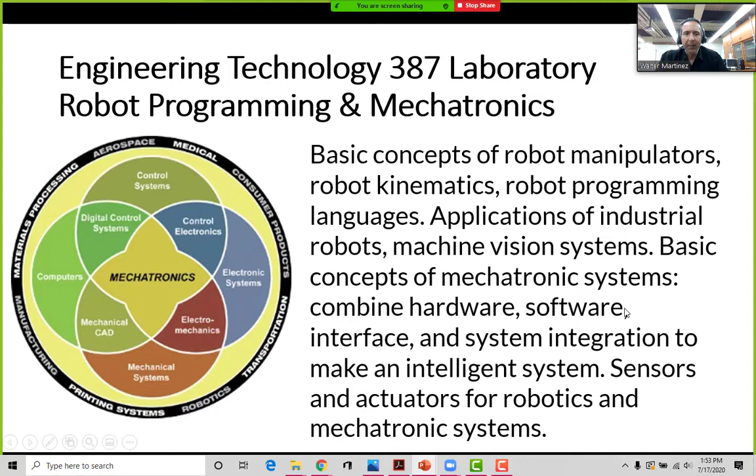There are 5 labs that we're going to cover, but let's first start with some of the things we're going to be doing here. Again, we're going to have a little bit of electronics - it's a little bit like my workstation looks like in my lab. We're going to have some software programming, and we're going to have some mechanics as well.

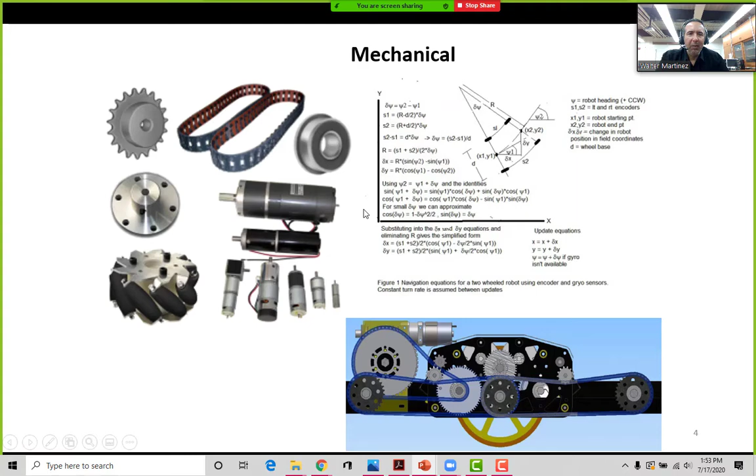A lot of the main industries using robotics or mechatronics include things like industrial robots, of course, right? Medical robots, aerospace robotics. But there are also other areas starting to come up a lot right now, and that is farming, for example, right? Mining trucks that are automated.

So imagine if you build a small robot with sensors that thinks and moves around and navigates on its own - that would be like building the mining truck, or building this farming tractor, or the Roomba, for example. It's the same concept: you have motors, you have sensors, you have mechanics, and you have software. They all have the exact same components.

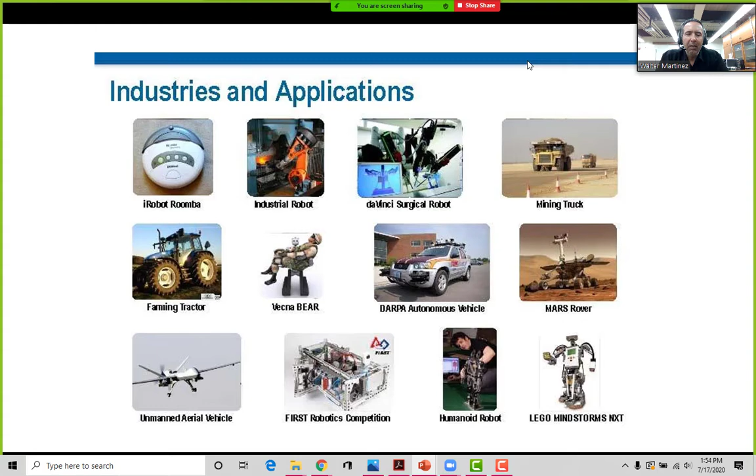So by learning how to do one, you have an idea of basically the understanding of the inside of how things work.

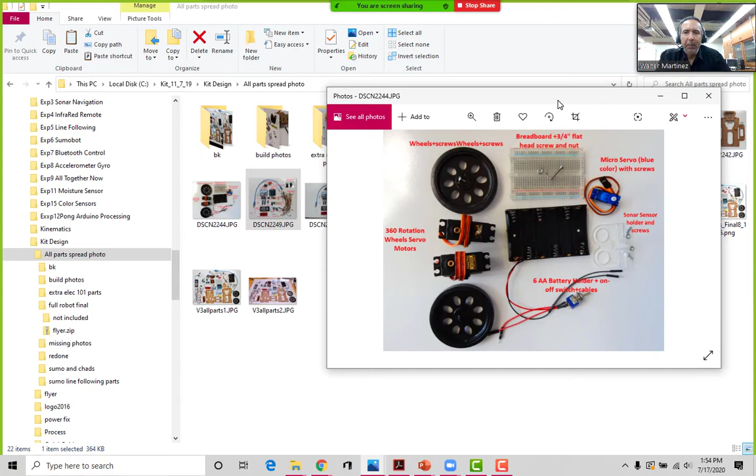This is the little robot kit that we're going to be using. The robot kit consists of a lot of parts, and let me show you a little bit of what those parts look like. Okay, that's the electronics of it. Let me grab a different view here.

Alright, so these are all the parts that you have, right? You have some of the chassis, you have some wheels, you have some motors over here, right? And you have a computer, which is the Arduino. You have a lot of sensors. You have Bluetooth radio communications, you have infrared remote, and then you have a way to program it, a power source, and a whole bunch of hardware and other sensors, an accelerometer, some other servo motors in here.

And so we'll be building this kit, and the kit looks something like this. You have the assembled robot - you have the top level, you have the bottom level here, and you have the wheels, and you have some sensors on the top. You have a computer and some more sensors over here.

So this little guy can navigate on its own without hitting something, for example, right? So here's a little bit of the scale of what it looks like. So that's a AA battery - gives you an idea how big or how tall it is.

It's really small, but it does take a little bit of time to build it. I've gotten pretty good at it - I can assemble one in 15 minutes, but we'll provide you a video of how to assemble each part and a video of each lab explaining how it's supposed to be assembled and working. There are also documents that show you how to assemble it, and a lot of sample code as well.

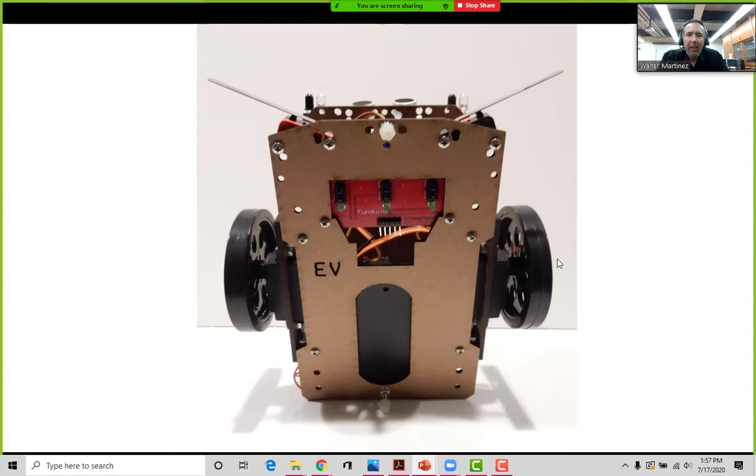tries to push it off the ring, and we use that particular ramp in the front. It all comes with the kit, it's the bottom of the kit. It's got some infrared sensors on the bottom so that it can detect a white or a black line. This is used especially in the sumo competition so that the robot knows whether it's inside the ring or is being pushed out. It's also used to follow a line.

So one of the labs is for you to follow a line with this particular sensor. Infrared sensors are just light sensors that can transmit a beam of light and reflect it back on the sensor. That's how you know whether or not something is in front of it or not.

Here's the back of it. You've got some batteries that go into it.

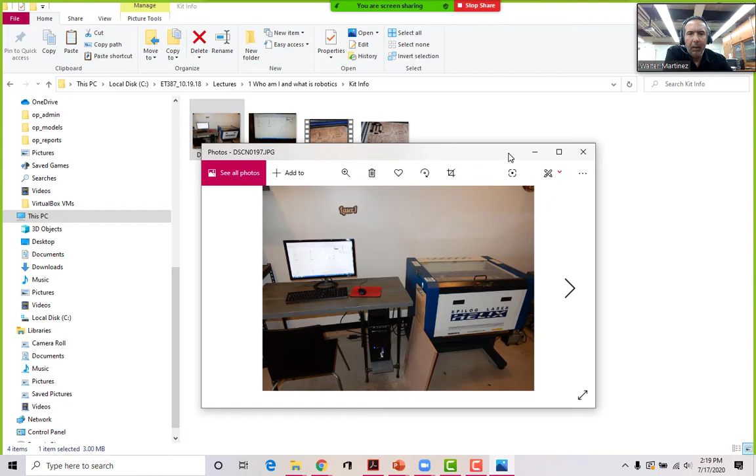A little bit more about the kit. The kit was designed using Google SketchUp, and it uses compressed wood as the chassis, and it is laser cut. I'll show you a video clip of how that works a little bit.

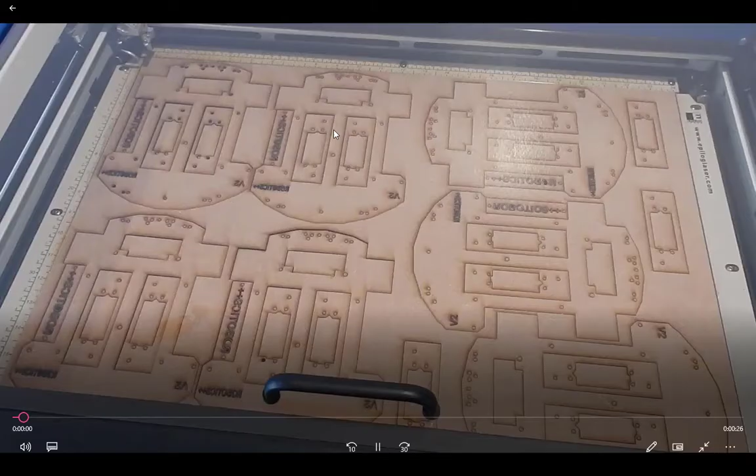This is some of the chassis being laser cut, and this is how they come out of the laser cutting machine.

Alright, so let's go over what we're going to be doing in those labs. The labs will be based on Arduino microcontrollers, a whole bunch of different sensors. You've got infrared, sonar, and some switches as well, and we'll have various ways to communicate with it.

You can use it on an Apple Macintosh machine, or you can use Linux, or you can use a Windows machine. A lot of the software that I have has been made basically on a Windows machine, but you can use pretty much any machine to download the software.

So the labs are going to be 5 labs total. 5 labs, they're 100 points each. It's 50% of the class. So make sure that you do all of the labs.

So the first lab, we're gonna have some due dates here. The first lab is you build a robot and navigate in a square. It does beeping and blinking at every corner.

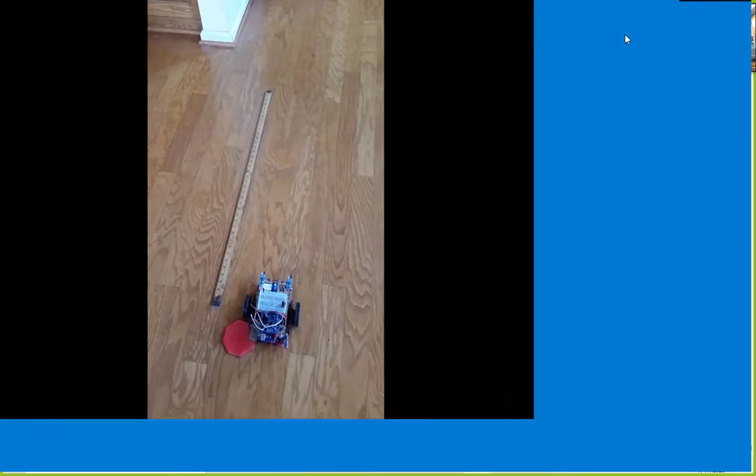Okay, I'll just show you a little bit what Lab 1 is supposed to look like. This is a demonstration of the robot. When you turn it on, let's read the program.

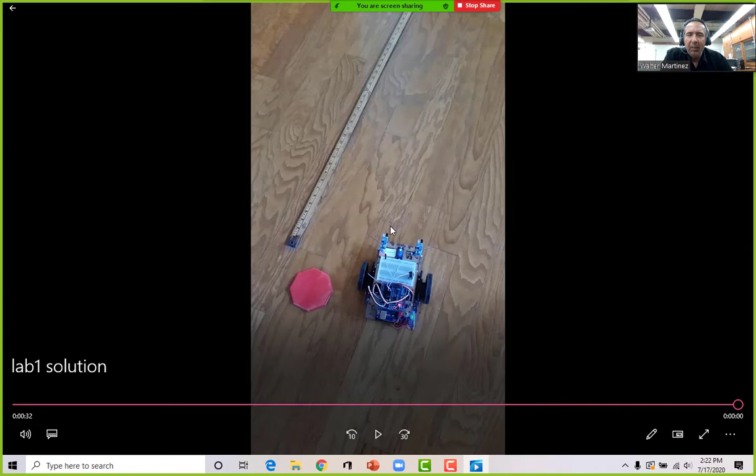You write a program that does that. It goes in a 3-foot square. It beeps at every corner, flashes the LED at every corner, and then it ends up where it started. So it's a good way to understand motor controlling, how to turn, sounds, how to do lights with LEDs, for example.

All right, here's a little bit of what that lab looks like. Okay, so you have some instructions that tell you what you need to do: navigate in that 3-foot square. Here's some students assembling their robots here, having some fun.

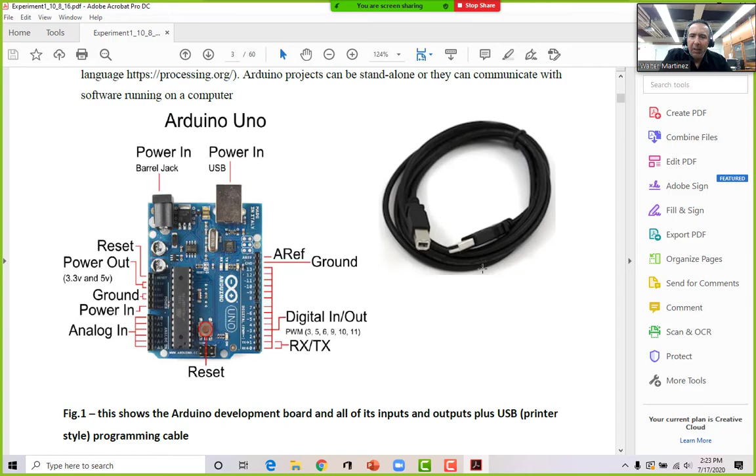It gives you a little bit of background about the Arduino, and we're going to go into depth in every video that you'll see. But this is the computer that we're programming for the robot. It's very detailed, it goes into step by step of what you need to do.

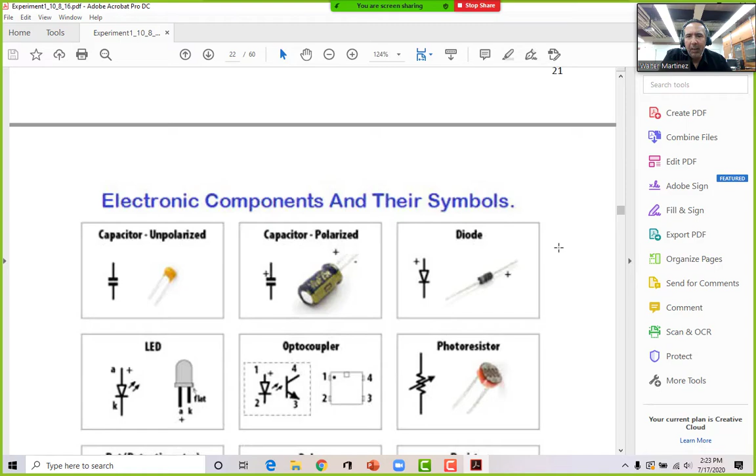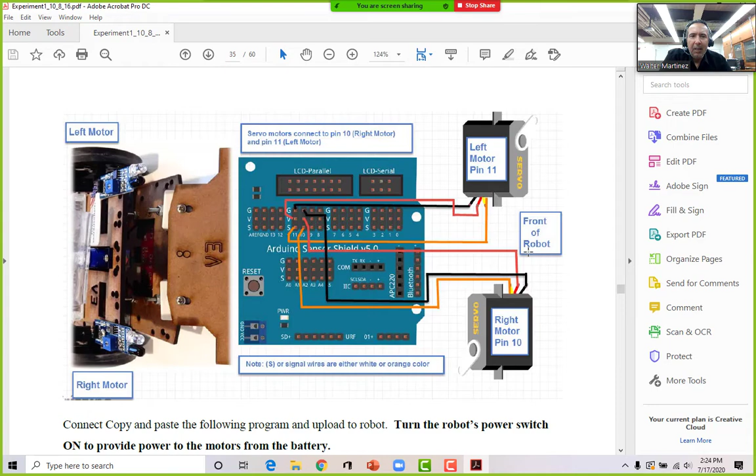Okay, it even shows you some electronics in case you've forgotten that some of the sensors have polarity in them. We're gonna cover each one of these things as we do the videos for each one of these labs. It's very exciting stuff, and I can't wait for you to start having some fun with this. To get the connections, how to connect the motors, and you got some code along the way that shows you how to test the components as you plug them in, how to calibrate the servos, and again, we'll go into details as we do each one.

But real quick, let's go to the next one. By the way, I got tons of examples on how to do things. There's even songs in here, some Star Wars songs, a Tetris song, so that you get motivated as you build this. You can do all kinds of things, like keyboard navigation - you can control your robot with the keyboard, for example. These are very exciting things that back in the day used to be very difficult to do. But now you just write some code, wire up your robot, and you're good to go. When I used to do this back in the 80s, it took a long time, many days to do something like this.

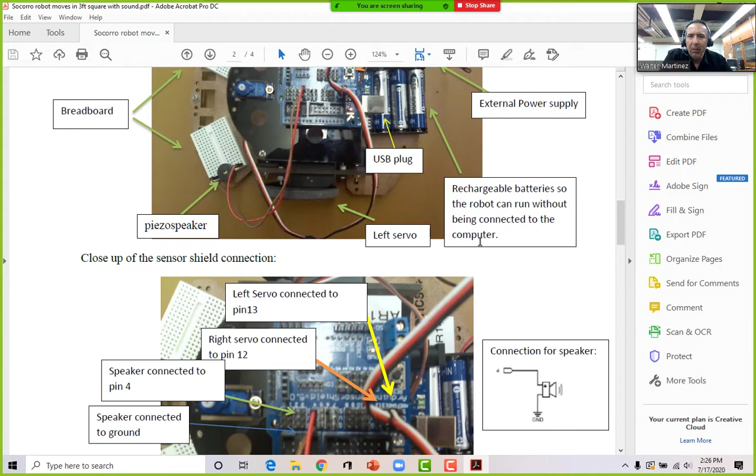Real quick, I also want to show you what the report looks like. So here's one - let's see what this student did back in the day. You have the objectives, the description of the project - what is it that you're doing, what did you do? And then you want to put in some more data, and I also want to see your code, exactly how you program it, and that's it. A little conclusion - what's the purpose of the project, what did you do, and then a conclusion of what did you find out, what problems did you have. Those kinds of things, and I just want to see your robot, how you wired it a little bit, and the code. There's many ways to do it.

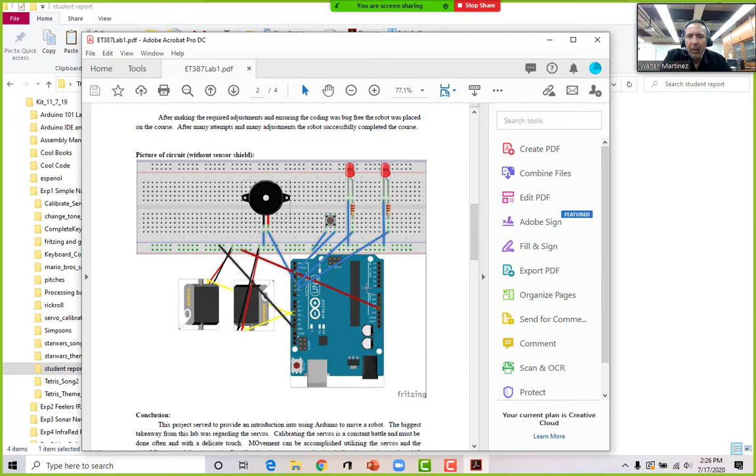Here's another one, another person who - by the way, there's free software out there called Fritzing that will allow you to draw this very easily just by dragging and dropping components, and then you can do some really nice lab reports with it.

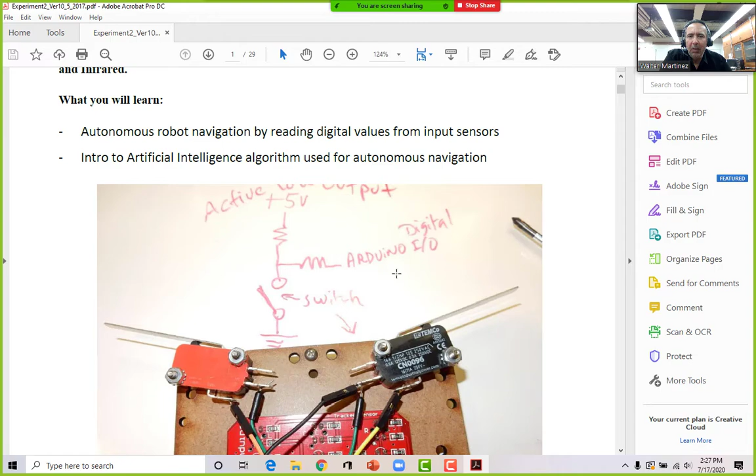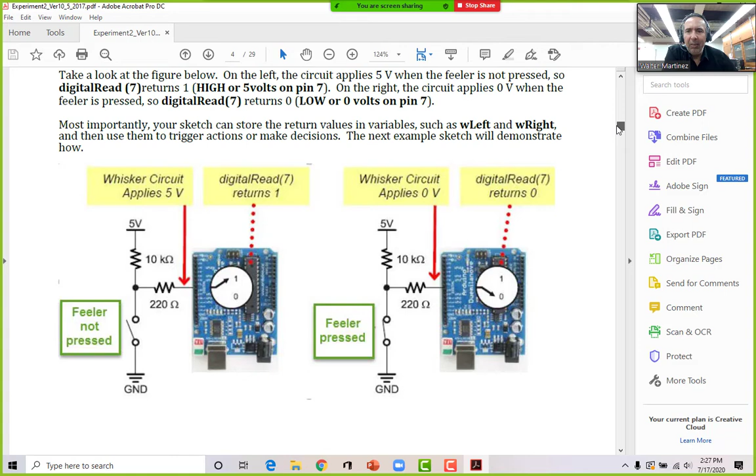Alright, lab number 2, feelers. Let's open that up. Experiment 2. On this one you're going to use these little feelers and infrared sensors, so you're going to have to use these little sensor switches here, and you will navigate with it, and the robot is going to go around the room, and if it senses something in front, it'll back away. But if it doesn't see like the leg of a chair, for example, you'll have switches as extra sensors. We're going to be learning quite a bit, about sinking and sourcing and microcontrollers. This is going to be really exciting stuff.

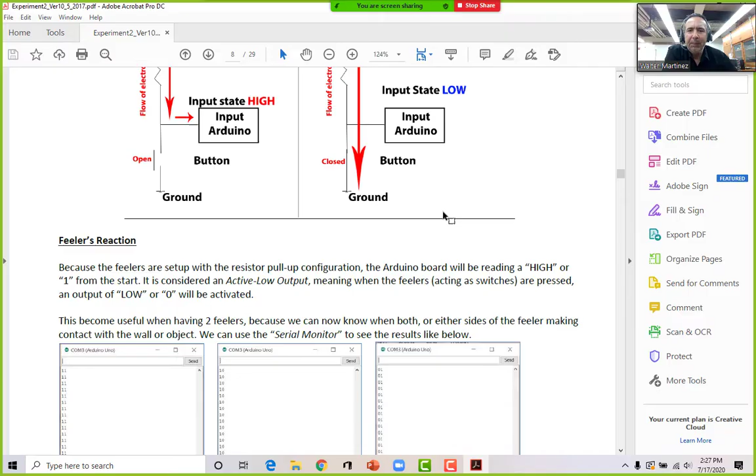Okay, so this is one of the things that I love to do - I love to experiment with these things and create these labs. As you can see, there's a lot of things. One of the cool things about this particular one is the example of escaping a corner - if your robot gets stuck in a corner because it hit the left switch or the right switch, it could be there forever doing the same thing, left, right, and never get out of the corner. So I show you how to do a little bit of AI in there, creating an AI algorithm - we're going to be using things like, if the robot has done the exact same motion four times, then that means it's stuck. So move on to the next level and try a different motion to get out of that corner.

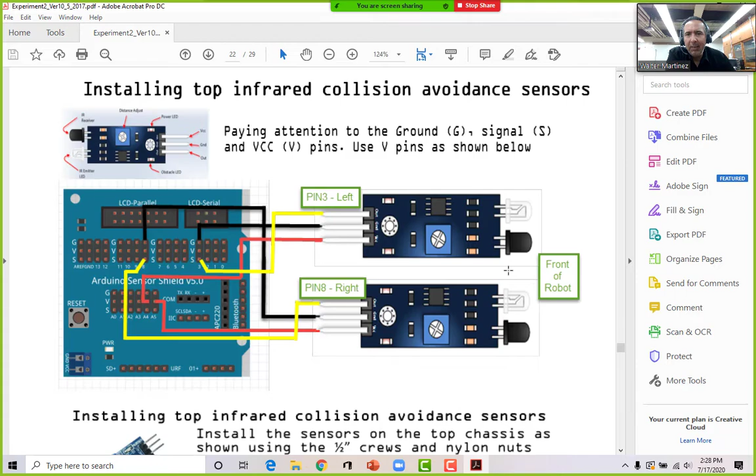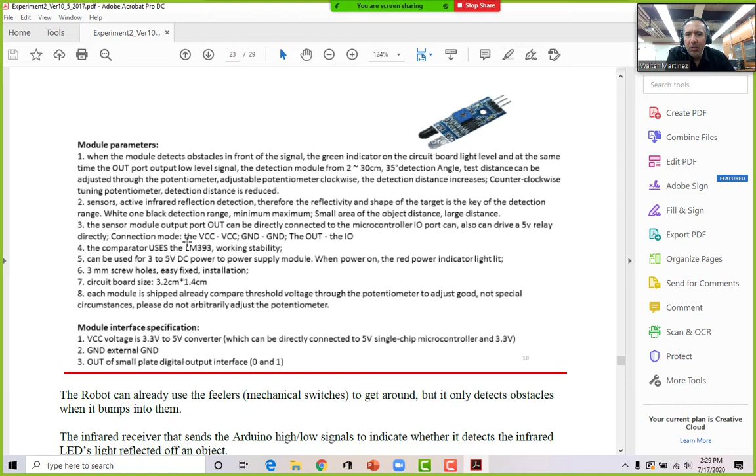I like these infrared sensors because they're adjustable, so they're really good - you can adjust the distance that they sense at, and we're going to be connecting them. I also like to give you the specs of the sensor, not just 'hey, plug the sensor and away you go' - I want you to see a little bit more about the specs. What chipset do they use inside that sensor? Because when you're designing or building a product, these are the kinds of things you're going to need.

All right, so I gave you all kinds of details about what infrared is, speakers, how to connect the speakers, how to make sound, and how to make some songs - if you're a musician, you'll appreciate that. Again, sample student reports - oh, this is the code actually, so let's go over here. Again, Fritzing is the software that you're going to be using to draw the graphics that you see there.

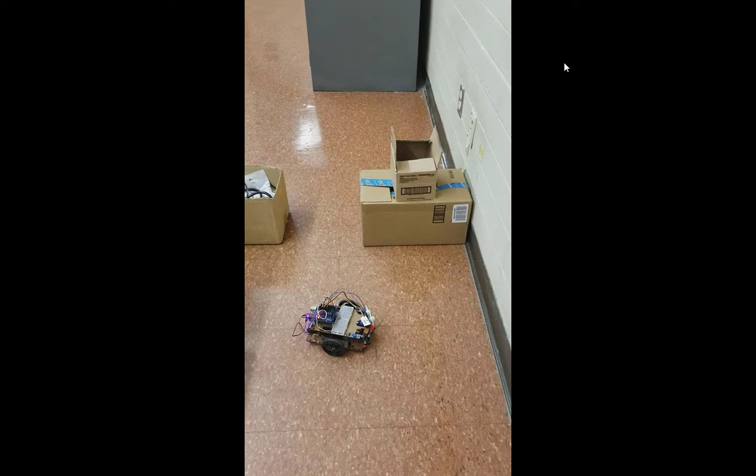All right, let's go to the next one. The next one is sonar, a sound-based sensor. Let's take a look at this video real quick. We're rotating the sensor so it locates if there's an object in front of it.

That's a 3D printed sensor bracket. I'll show you and teach you how to 3D print. So if you have a 3D printer, I'll show you how to design those brackets and how to print them.

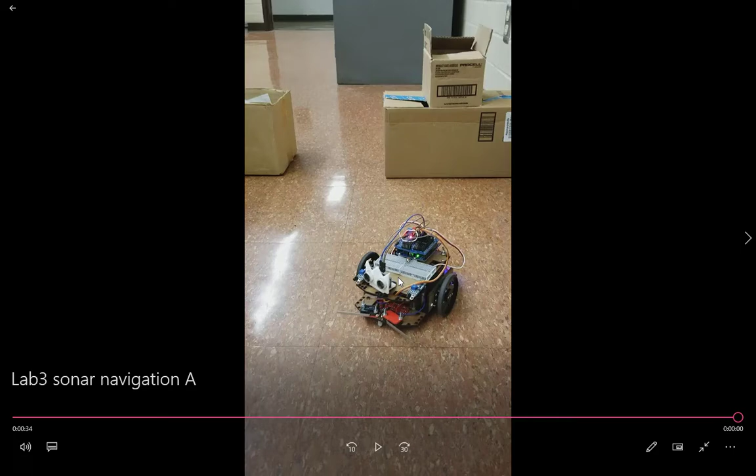It's kind of exciting to see these things because the little robot looks like it's alive. By the way, the bracket for the sensor was designed by a student, so you design whatever you want. Some people do like Mickey Mouse ears, Batman faces. It's as creative as you want to be. That's the beauty of the class, it lets you be as creative as you want to.

This is a little bit more of the solution. I'll show you a little bit more what it's doing. You see the sensor on the right hand side here? It clicked it, so it knew to turn to the other way and then get out of there.

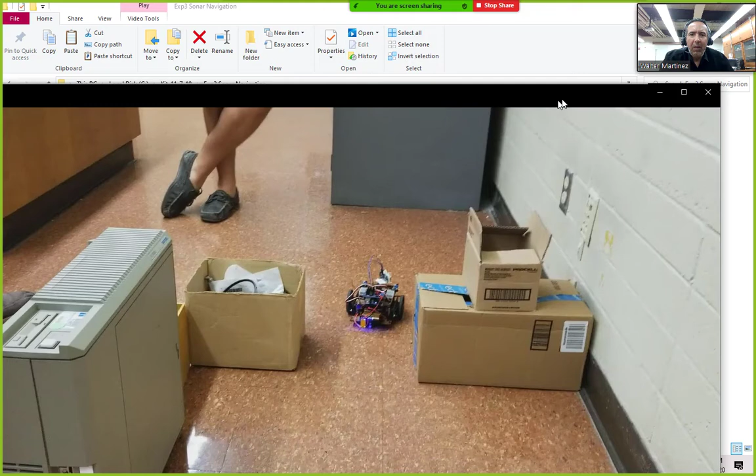In your home, you can put some boxes around to create a maze that your little robot can navigate in. You can do this anywhere you want to. Let's open up those instructions, there are so many examples, and I love the sonar sensor. It's one of the most exciting ones.

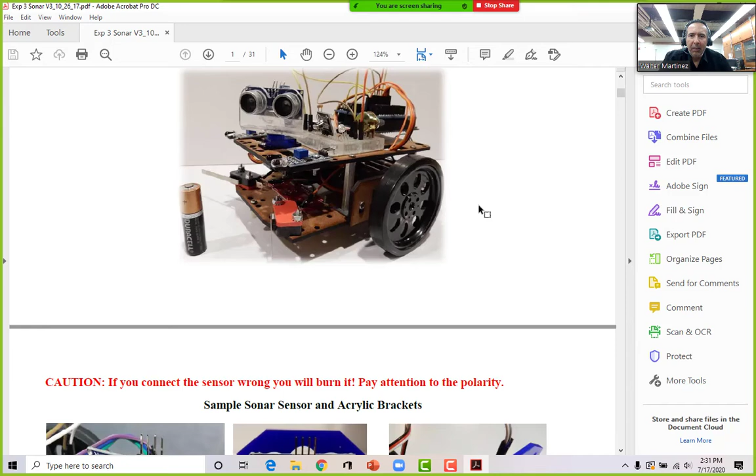Let's open it up real quick. So there's a little robot with the sonar sensor. The kit comes with this plastic clear bracket, but again, you can design your own.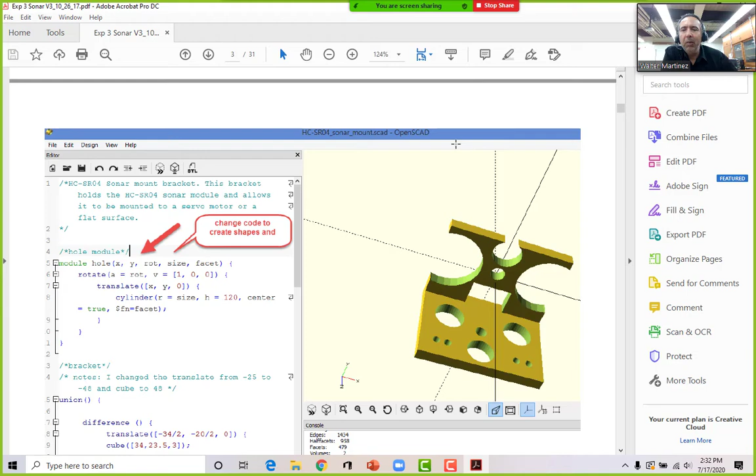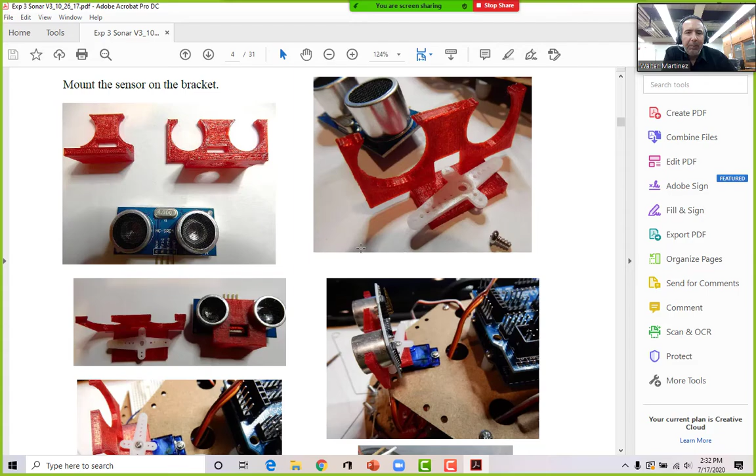You can use this open source design program called OpenSCAD, or if you're familiar with any other 3D design software, you can use that too. I like this one because it's very trig based and programmatic, so I like to program the circles and things like that and render it, creating my own brackets that way. Then you can 3D print them, save the file, and install the bracket. Very, very neat stuff.

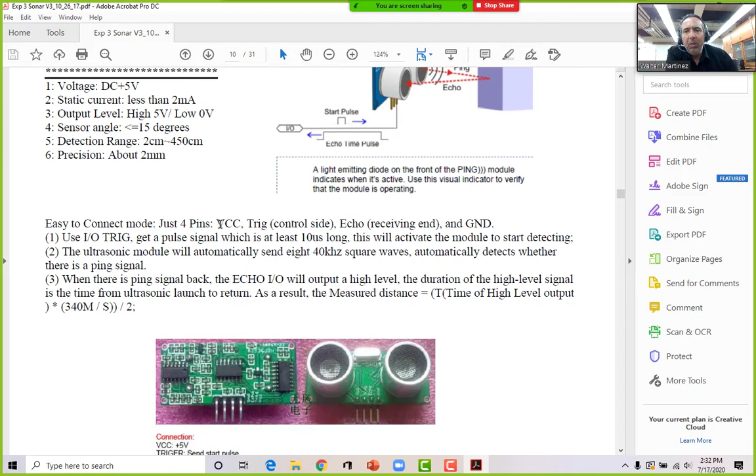I give you the specs for the sonar sensor, and then some sample code and libraries. Libraries are pieces of software that allow you to program this in an easier way with less lines of code. I show you how to test the sensor, to make sure that it's working.

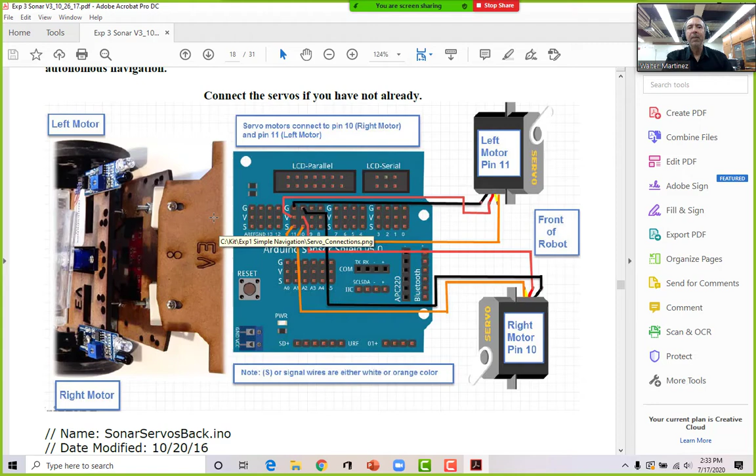I give you some samples of what to do with it, but then it's ultimately up to you to figure out how to put these pieces together. You are an integrator of all of these things, and ultimately it's up to you to figure out how to put everything together, using all the tips I give you to navigate.

So in the first labs, you learn how to navigate, how to control a motor, and you'll apply the exact same examples you did in the beginning to this one. This just expands upon the first examples. Lots of things on 3D printing.

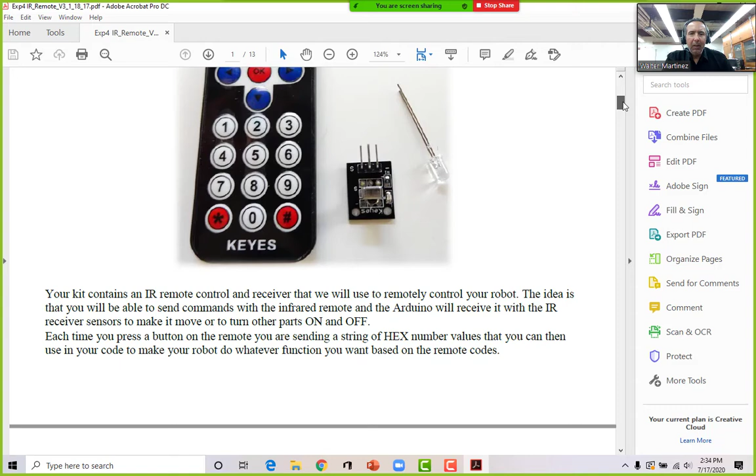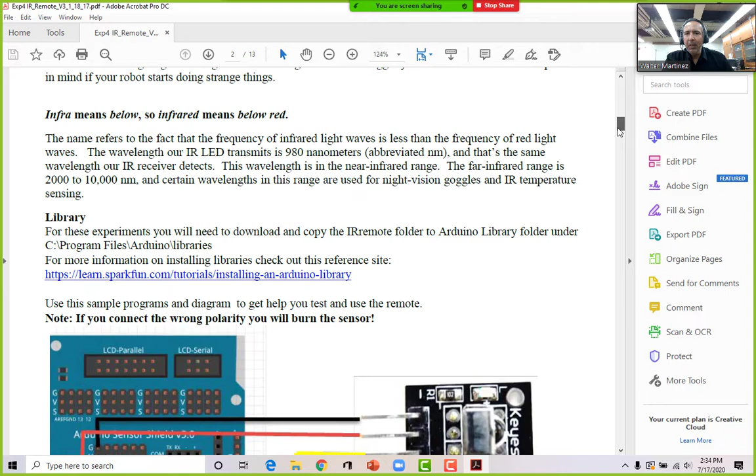Let's go to number 4, infrared sensor. The idea is for you to use a little infrared remote control to control your robot, and this one has some interesting software. The infrared signals are encoded in hex values, so you'll learn how to do that. You'll also learn about case statements. This is very software driven, and it's really neat.

You'll be able to make the robot go forward, backwards, left, right, depending on the signal that is received. You can also play different songs depending on the button that you press. It's a pretty interesting little project.

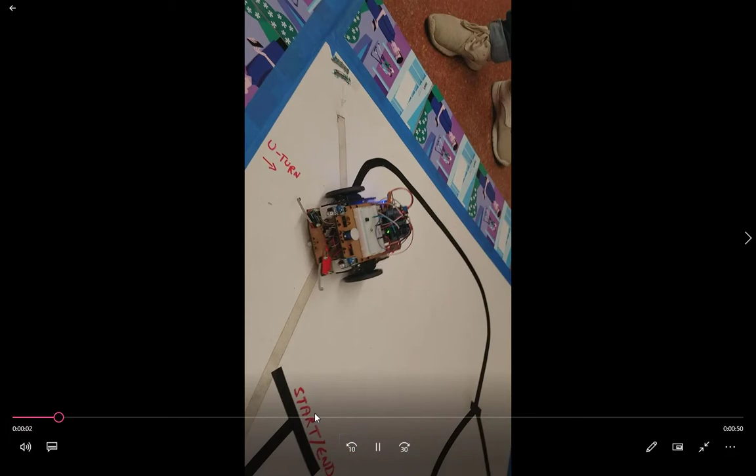The next one is line following, and for line following there should be some videos here. Yeah, here's line following. The robot starts here, goes around the maze, does a U-turn at the end, and then it's supposed to go back to where it started from.

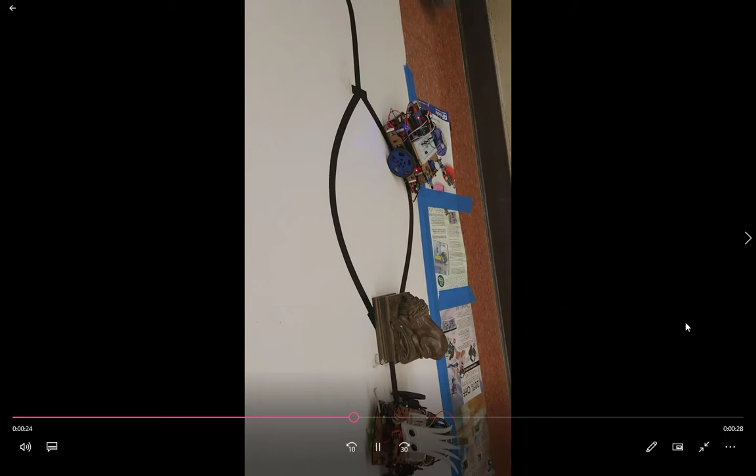Okay, so there he goes. I often put some obstacles, so it has to avoid them and go around by itself. See, like that one failed. There's that other little guy there, he's a little bit smarter, he knows what to do.

Skip that and let it continue. Mine found it, why didn't yours? Mine didn't - there's always people questioning how this is done. This is actually my little robot that did it. And then it ends right there. This is really nice - we do a competition to see who does it the fastest.

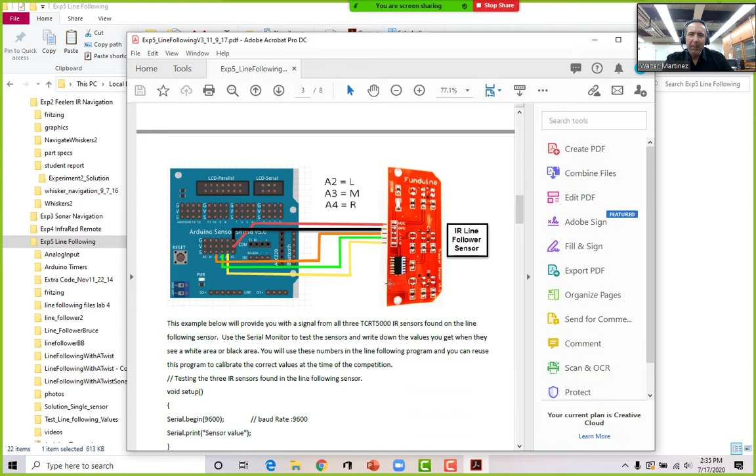I'm providing quite a lot of data in there, and you're going to be using this particular infrared sensor here. It shows you how to connect it, and specs on the sensor, which is very important. There are lots of examples, but ultimately it's up to you to calibrate everything and make sure it works.

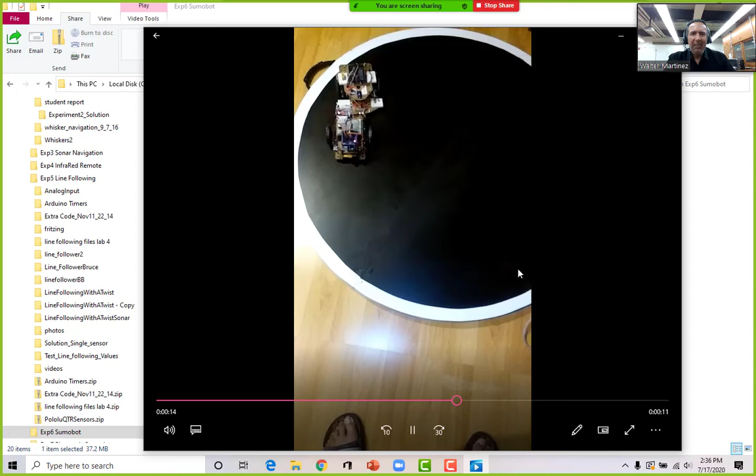The last one here, but not the least, is the sumo competition. The idea is that your robot goes around and looks for the opponent. The opponent's supposed to be moving, but for some reason this one is kind of dead. It's supposed to find the opponent - I got some samples on YouTube that are really exciting from competitions over the years. The little robot is supposed to kick him out of the ring after it finds it.

Let's take a quick look at the instructions. There's a lot of things you have to be able to do with this one in order to get it to work correctly.

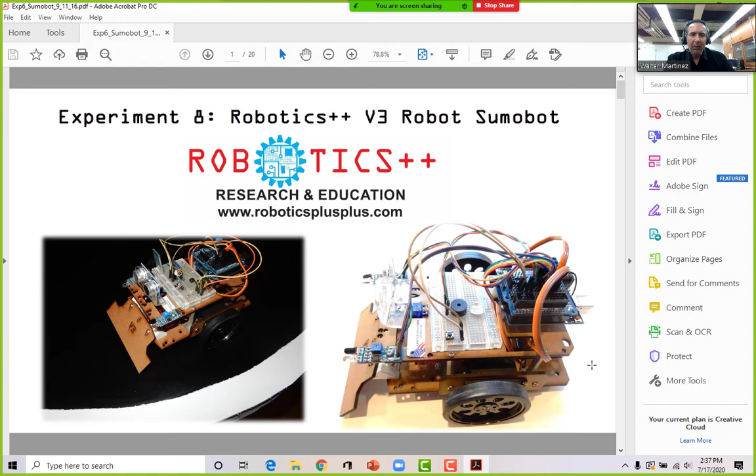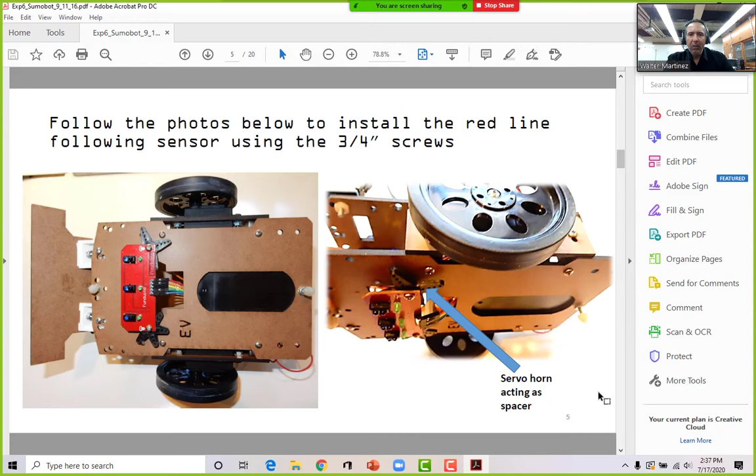First, you're going to be changing the front - you have that little ramp now in front instead of the switches. And there are some rules: you get 3 minutes to look for your opponent and kick him out. There are instructions here on how to install everything, but we'll have videos on how to do all these things too. Very exciting stuff.

You're going to have to figure out a lot of it at the end there. I gave you some basic sample code on how to test things, and then you have to integrate it.

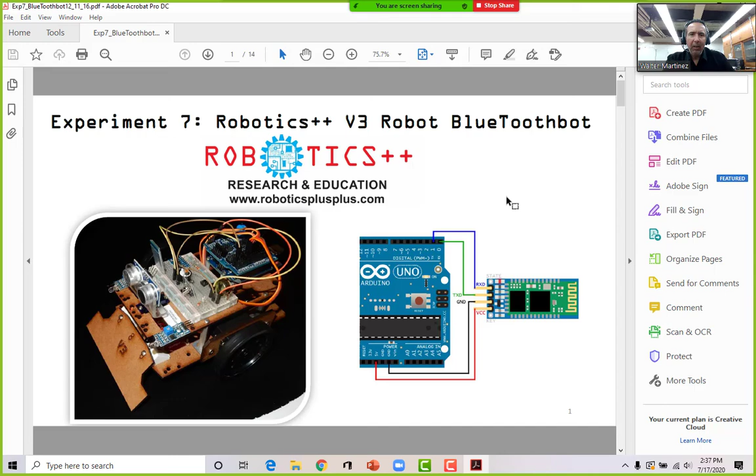There's another one here, only if we have time, where the idea is how to use a Bluetooth module to control your robot via a phone app. I show you how to build it, then how to use an existing app, but I also show you how to create your own app using the MIT App Inventor, and then how to use code in Arduino to control it. Very basic - you connect to the robot via Bluetooth.

You can go front, back, left, and right, but you can also use this app that's already been created, where you can navigate with a touch wheel on your screen. The nice thing about this one is you can get sensor data back into the cell phone. That app was built by someone else, but the one I did was very simple, just to give you an idea on how to navigate forward, back, left, and right - basically making a little RC car type of thing.

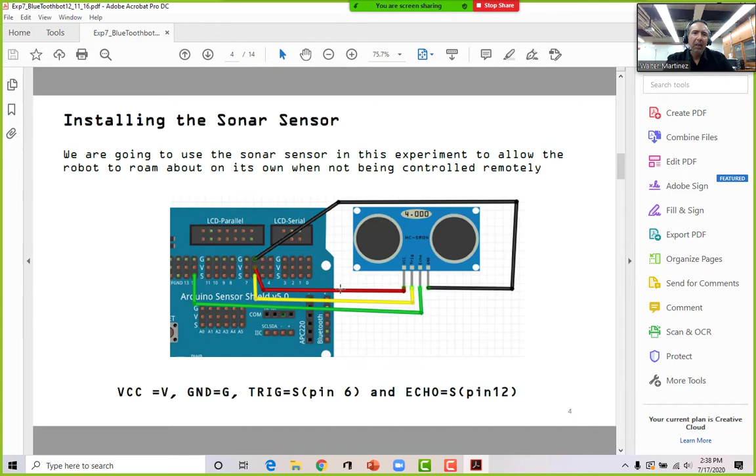Very exciting. There's another one, only if there's time, which most of the time we run out of. If you want to experiment with accelerometers, there's also a moisture sensor, and how to make video games with your little robot. So there are so many exciting things in there, but that could be something you do on your own or for your senior projects.

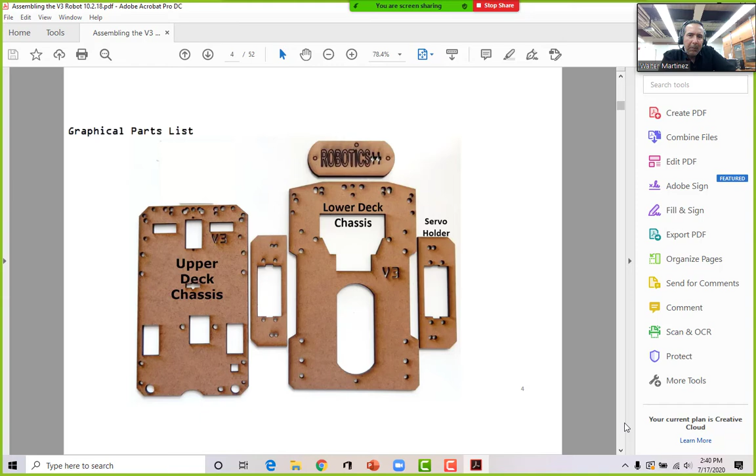There is an assembly manual in here as well, and it should be really detailed, with also a parts list of every part that came with your kit. Here's the assembly manual - and again it's really detailed. This manual has been used quite a bit by a lot of people.

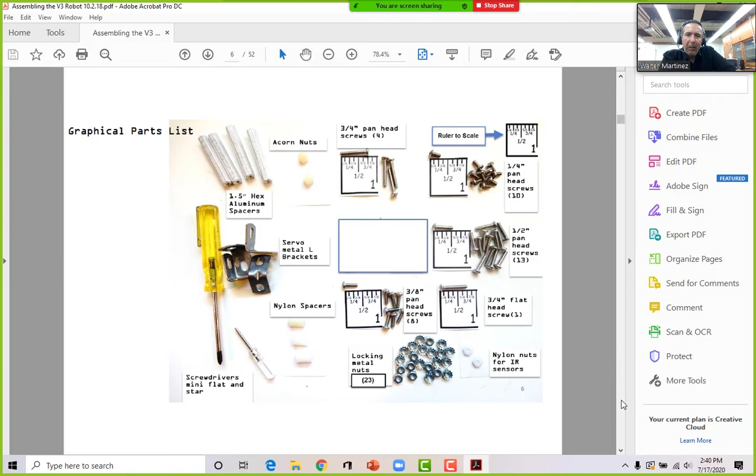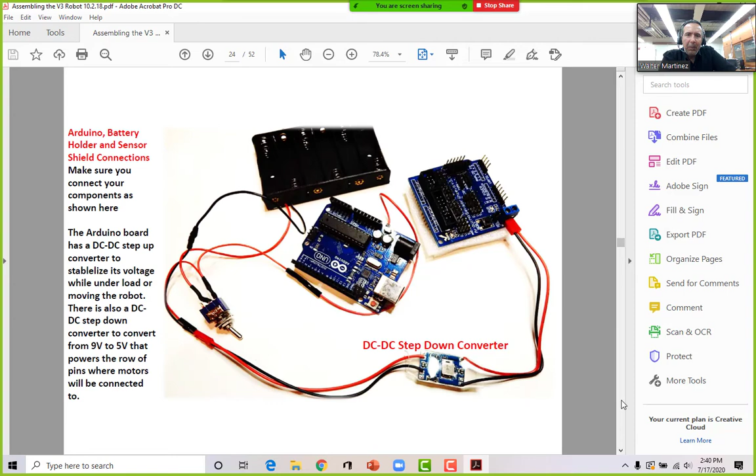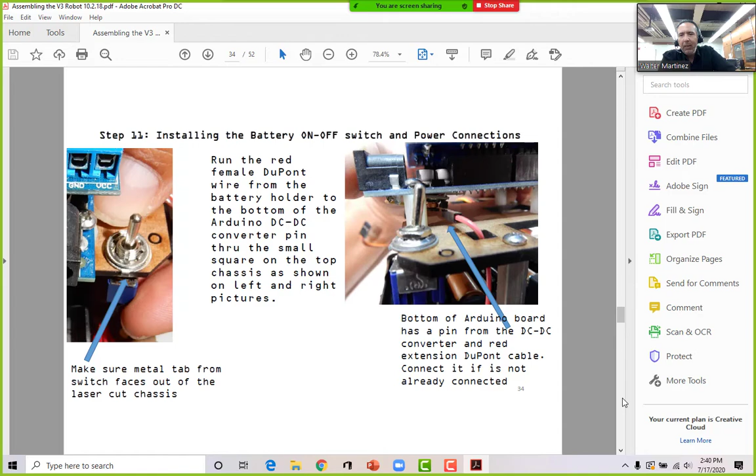There's also a sheet that comes with your kit with a ruler showing what screw sizes are what. It comes with the screwdrivers you'll need to assemble it, and all the parts - the different motors and things like that. It shows you detail by detail how to assemble everything. No soldering required - you just have to assemble and wire some things, and at the end of the day you'll have a fully done robot.

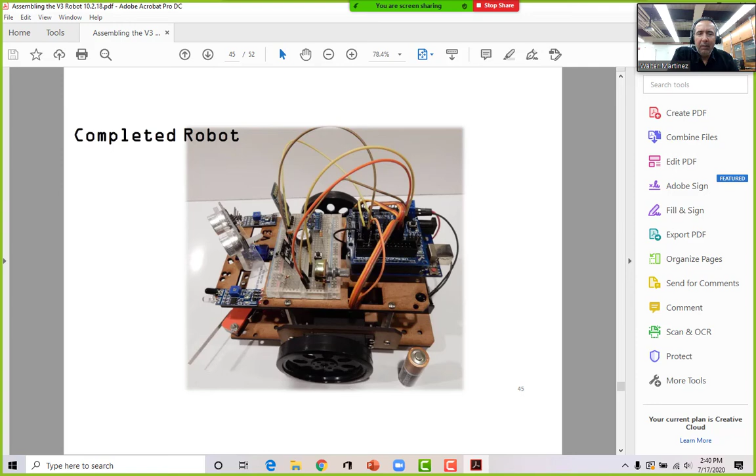Like I said, I have a lot of experience, so in 15 minutes I can assemble one, but we'll do a video on how to do this.

Stop. Let's go backwards. Alright, make a turn. Make the other way. Go forward. Stop. Go backwards. Stop. Play a song.

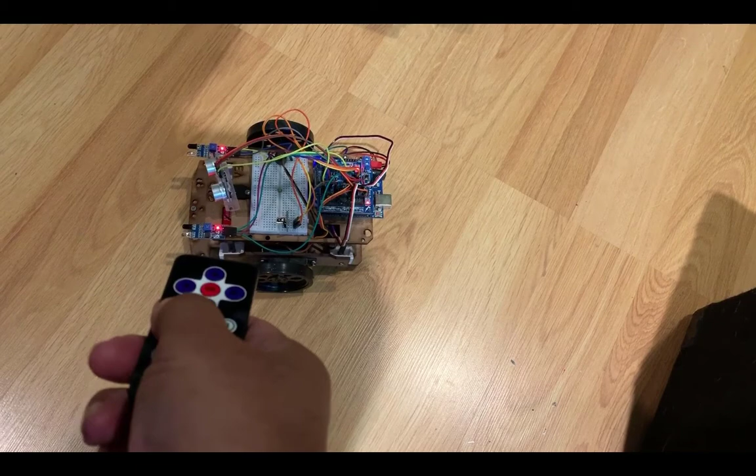Then we have to wait till that loop finishes, for that song function to finish. Then we can go ahead and go forward again.

Let's see if it finds the line. Oh, it found it - like barely. You see that? By like a millimeter.